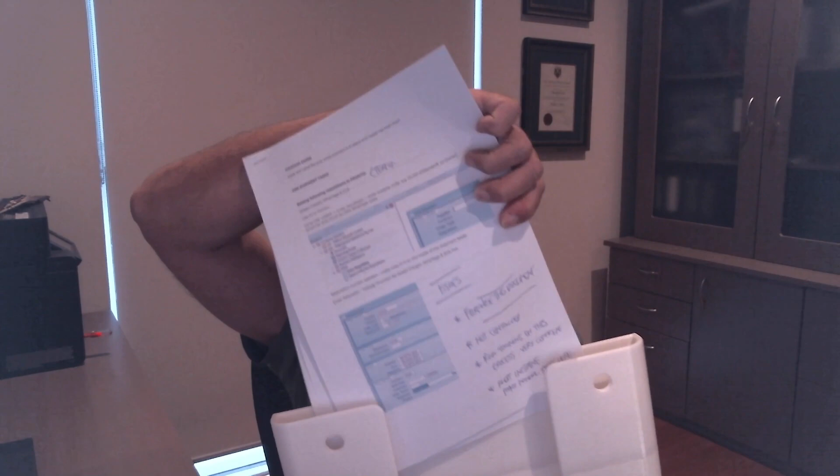I can also go into the portrait version, and you've got plenty of room there as well. I'll show you in Fusion a bit more about the actual dimensions, but I've given myself a little bit of space without too much—probably could have gone a bit thinner, but not too much more than that. I think that's actually not too bad.

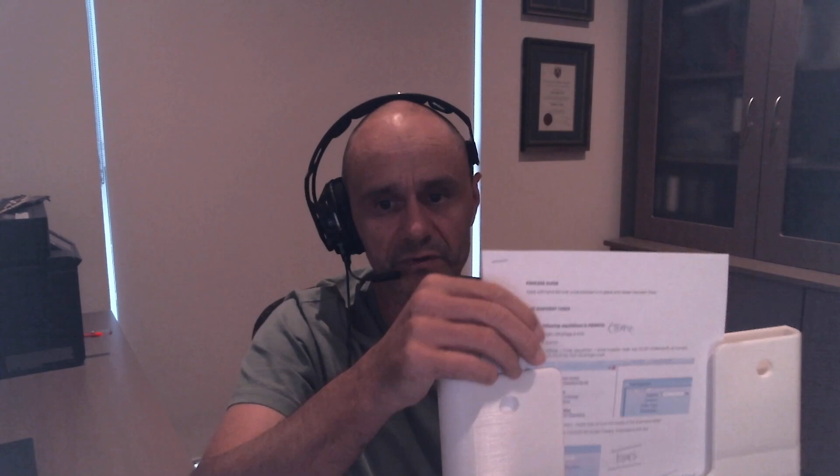The other little features I've got on this are, just aesthetically, a bit of a cutout through there, and then some holes in the front. That's only for mounting purposes for the back, but I'll show you that in a moment in Fusion.

To get this to print, you can see it's been done over several stages. I had to layer this, then I sliced it, printed it vertically, but sliced it through here—didn't mean to slice it through this one. It's because I had a power cut, and it got all the way up to there, so I had to do that bit separately. That wouldn't be in the next one, and then it was just the base.

Had a little bit of warping as well on my printer, a bit of warping through there, but you're not going to see any of that once it gets painted up in the same color as the inside trim of the Sim. I think it'll look pretty good.

Let's jump into Fusion 360, and I'll give you a bit more dimensions on this thing for those that may be interested in doing something similar for yourself. Okay, here we are in Fusion 360, and I've got the front pocket up on the display.

Just taking a quick pause, but look at all the different bodies that I've got all through Fusion 360 that underpin my simulator. There's quite a lot of work in all of that, quite a few sessions in itself, but that's where a lot of my time has gone in the Sim.

Anyway, coming back to the pocket here, fundamentally this is actually in 3 pieces. You can see I've got bodies 1, 2 and 3—if I float over that, you can see I've effectively got this bottom piece here, basically this face here, number 2 through here, and then number 3.

The reason for that slicing was purely so that the 3D printer which I have, a Creality CR10S Pro, can print it successfully across the bed. To do that, I actually had to go diagonal on my print bed because of the length, and I'll get into these dimensions in a moment.

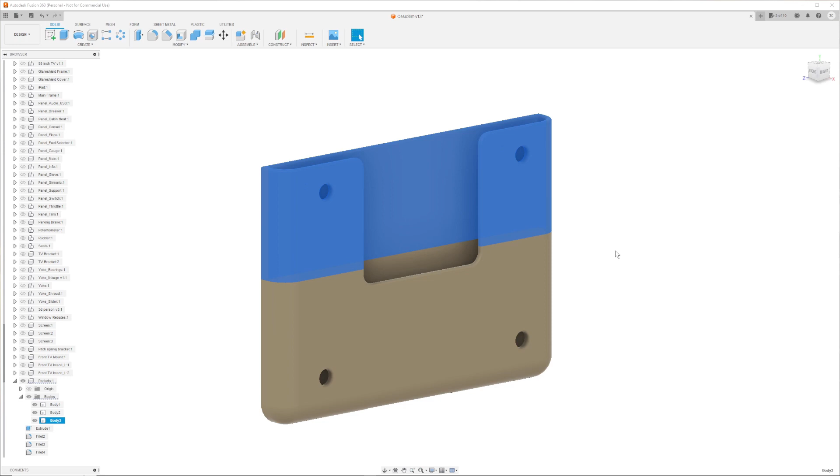To take you through some of the features of this, and it's nothing flash, as you can see. It is purely just a solid pocket.

Basically it gets fixed to the inside of the wall of your simulator, on that side there. I've kept these holes through the front so I can literally push a screwdriver through with a self-tapping screw, and be able to screw that in there.

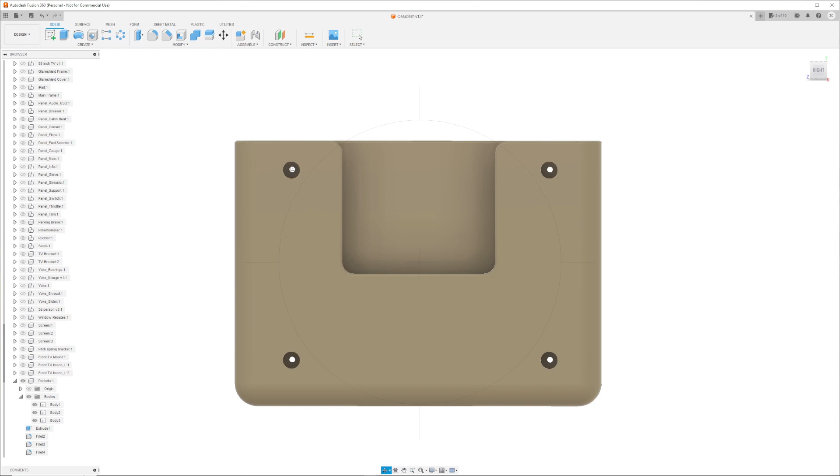What I'll probably do once it's in position is make some 3D printed filler pieces to fill that in, then paint over the top, and you're probably none the wiser. I'll make them almost like a push fit so I can push them back out again if I need to get to those screws.

That's the reason for that, so I can screw it and have it nice and neat. Otherwise you'd have to have some flanges either side, and that would look a bit more untidy. Once that gets done, I'll push those filler pieces back in and paint it. Yeah, it'll look pretty good.

I've fundamentally just rounded off some edges as well, just to keep it nice, with a fillet through there. Again, for aesthetic reasons, and also practically, I cut out the front a little bit so that if I have something in landscape, an A4 in landscape, you can grab it from here, which is handy. But also in portrait mode it's just easier as well.

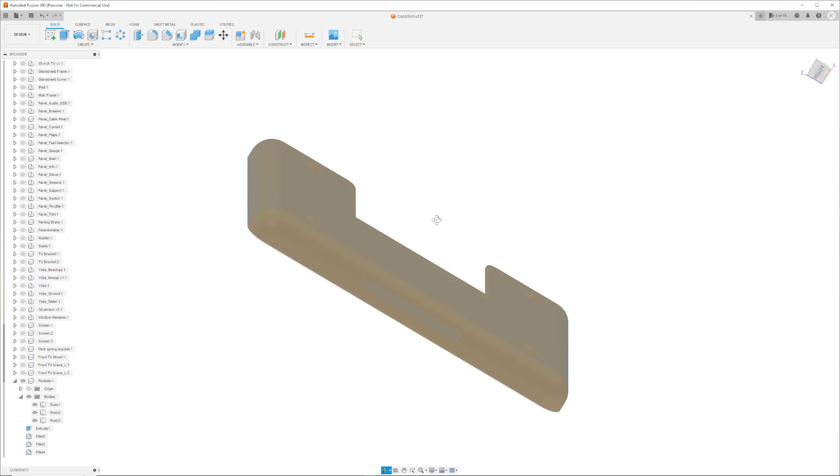Since it's solid, I can imagine over time dust would get in there and build up, so I did a little cutout at the bottom, as you can see, so I can sweep the dust out rather than trying to suck it out, because you're not going to get a vacuum down there. You can probably get a small brush to brush it out and grab it that way. That was the reason for that cutout, and that's pretty much it.

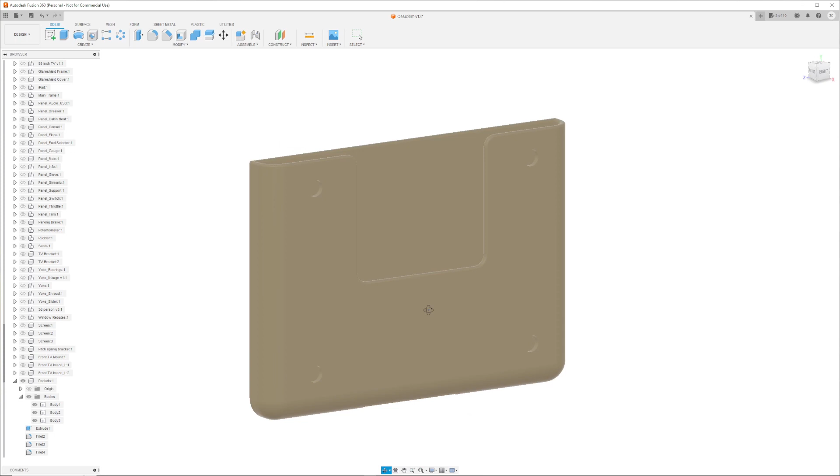So let's get some dimensions for you now, if you want to have something for yourself or have a look at something similar. This is purely just taking, the way I did this was looking at an A4 sheet of paper, and working out a little clearance either side. You can play around with this to your heart's content. Let's go.

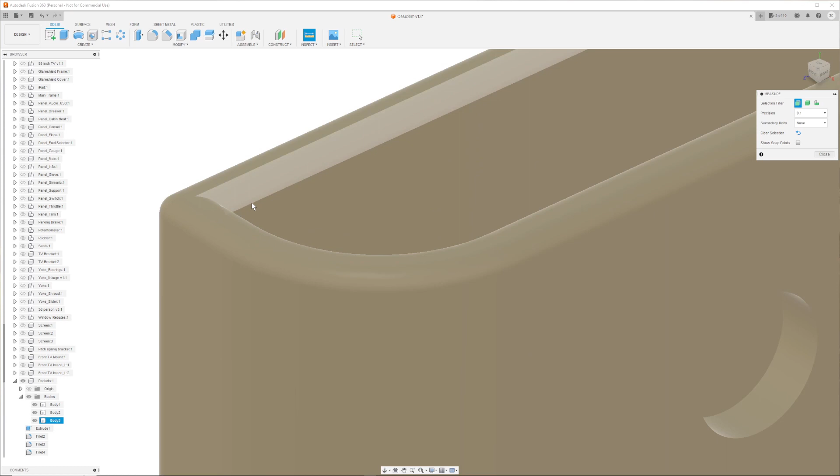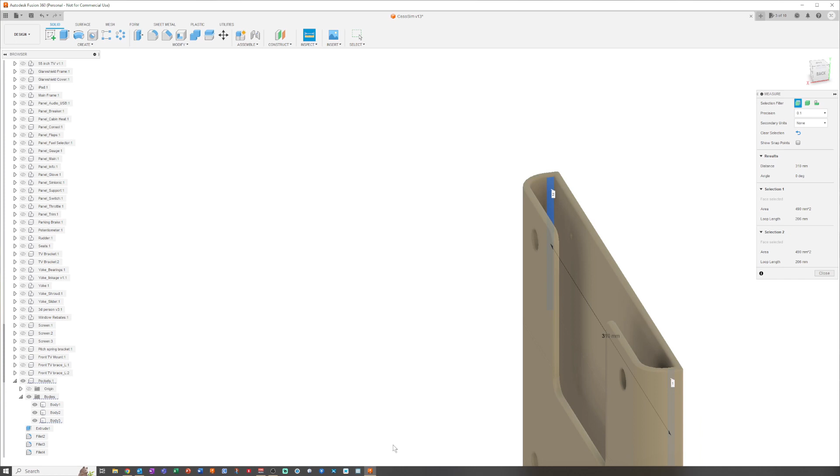I'll do some internal dimensions first and we'll go from there. Internally, let's do the width of this thing. We'll come from here - it's a bit hard with the fillets on - but we'll go from that side to the other side, and do a quick dimension. That's 310 millimeters. Stand corrected, should learn my Fusion.

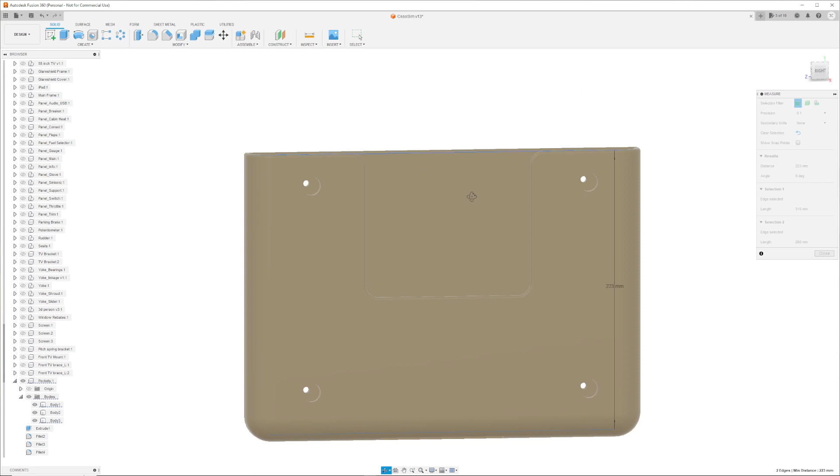310 millimeters inside. On the outside it's a bit more difficult, but I'll do my best. It's about 223, as you can see, but that's roughly to the underside, so roughly 225 if you want to round it, close enough. So what do we say - 310 on the inside, 223, and then the actual inside clearance between the two faces.

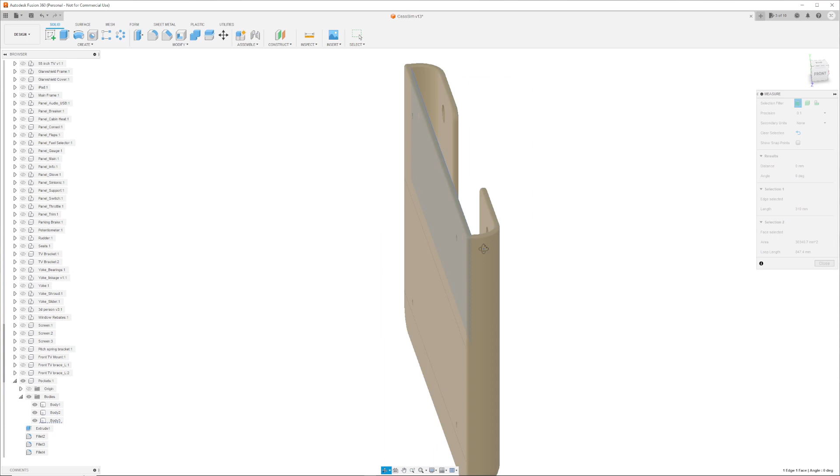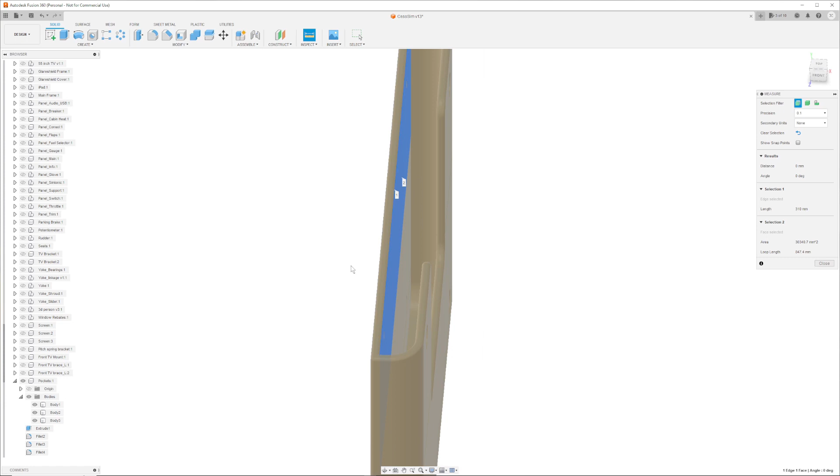Let's do that one now - that is 20 millimeters clearance inside the wall. The actual thickness I did this at, I went pretty sturdy actually because I didn't want it to be flimsy. I'm pretty sure I've got either 5 or 6, but let me check again. Five, there we go - so that's 5 millimeters. The thickness of this was done at 5 millimeters.

So there you have it, a solid front pocket for the simulator. I think that'll end up looking pretty good once it's all painted up, pretty much like my upgrade number 1.

I haven't done any of the painting yet for both the first upgrade, those side window cutouts, nor this one. I'm hoping to get that done in the next couple of weeks as we progressively move through those upgrades.